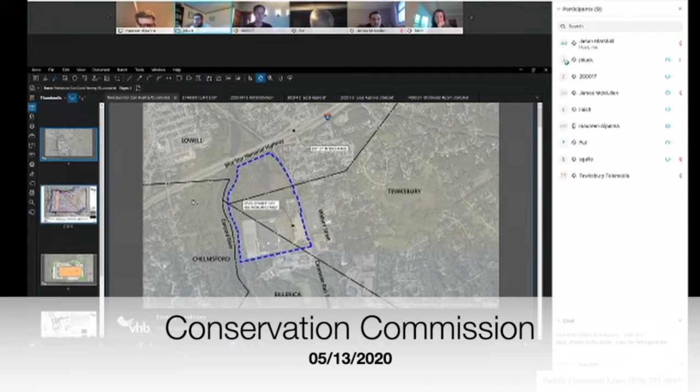All right, I'm going to share my screen here, have some graphics. So we were before you about a month or so back. This is regarding the redevelopment of the former Raytheon site at 495 Woburn Street. Here's the overall site development graphic—I'll just recap. Overall, the site is about 118 acres in total. There's about 46 acres in Tewksbury, about 34 in Billerica abutting the river, and another 38 in Lowell. The existing Raytheon building is about 445,000 square feet.

The site is bounded by a large wetland system to the north, commuter rail tracks to the east. Acre Commodities is the abutting property to the south. There is a small wetland, or part of a wetland system, on the southeast, and the Concord River is immediately to the west here.

I'll flip to the proposed redevelopment. What we are proposing is a full redevelopment of the site. The existing building would be demolished, and all of the pavement, pipes, everything will be fully scraped from the site. Here's the proposed building—about a 715,000 square foot footprint. The entirety of the site will take place within the existing limits of pavement of the former Raytheon site. You can see this green hatching along the south, west, and north—that is all area that is pavement today that will be returned to grass in its final condition.

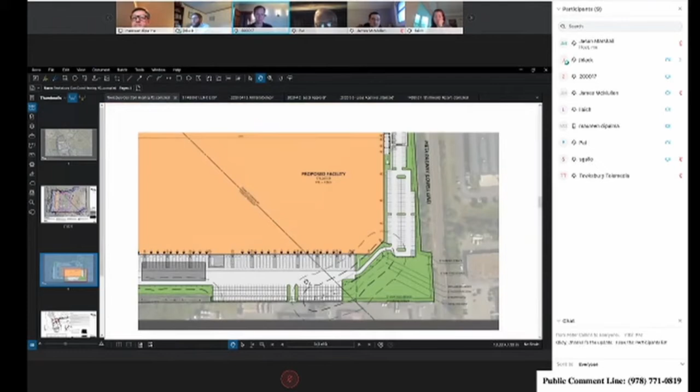Because of that wetland fill, we are proposing two separate wetland replication areas. This diagonal line through the building is the town line between Tewksbury and Billerica. As you can see, a portion of this isolated wetland is in both towns, so we are proposing two separate wetland mitigation areas. One will take place up here in Tewksbury, and another will take place in the northwest corner of the site in Billerica. I'll let Laura speak to that more in detail.

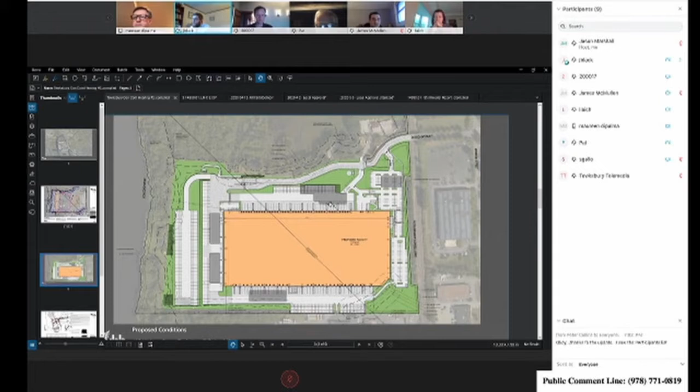We are proposing all new updated stormwater management systems. The gray hatched areas are 5 separate stormwater management areas, all subsurface. Some will be StormTrap units, some will be plastic StormTech units, but the stormwater design meets all the state stormwater standards.

Actually on Monday night we finished up the planning board process here in Tewksbury. This stormwater management system has been fully reviewed by Kevin Hardiman, the town engineer, and we had received his approval, his okay, through the planning board process.

Can I just ask you to speak a little louder? I'm having a tough time hearing. Sure, yep.

So yeah, the stormwater system itself has been reviewed by Kevin Hardiman, who okayed it, and on Monday night we had received planning board approval for this project.

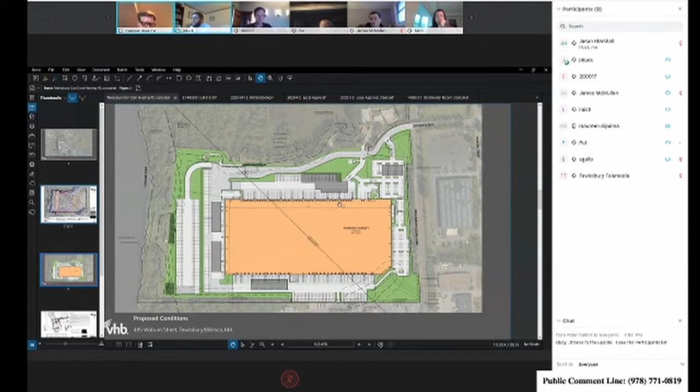Other than stormwater, all existing utilities that service the site today will be reused, including existing electrical, gas, and water connections that already service the existing building. The only exception is a new sanitary sewer force main will be proposed. That is going to be hung on the Discovery Way Bridge and will tie into an existing sewer manhole here on Woburn Street.

So that is, in general, a description of the site. I'd be happy to answer any more questions, but I'll start by passing it over to Laura, who can explain more of the wetland systems that are on the site here.

Is Laura there? She told me she was online. I think she's muted. Yes, she's not. Sorry, I can't unmute here. We can hear you now. Oh, now okay, great. Oh my goodness, I was trying everything. Thank you.

Well, I think there's a couple things to note. We touched on this during the opening hearing as well, but as Jeff indicated, the area of fill for that isolated wetland in Tewksbury is about 2,300 to 2,400 square feet. The replication area will be one-to-one on the north side of the site, but it will be adjacent to a contiguous BVW area, as opposed to creating another isolated area elsewhere.

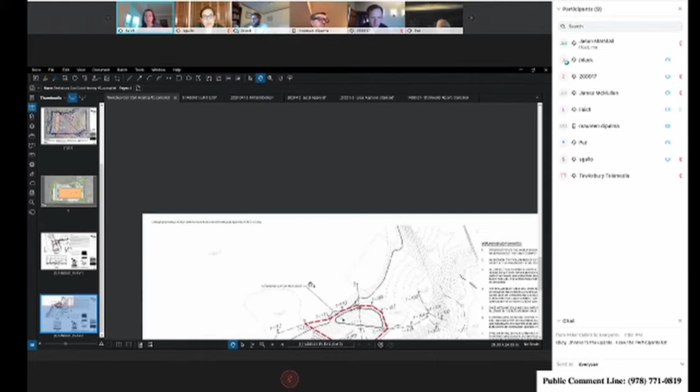This is kind of the blow up of the wetland mitigation design there. I did want to note, to give everyone a progress update, Bill Manuell, who's performing the peer review for this site, was able to walk the wetland line yesterday. He reported back that he was comfortable with the line. There were, I think, a couple flags in one particular location that had been disturbed and pulled off the existing vegetation, and he was going to write that in his response letter.

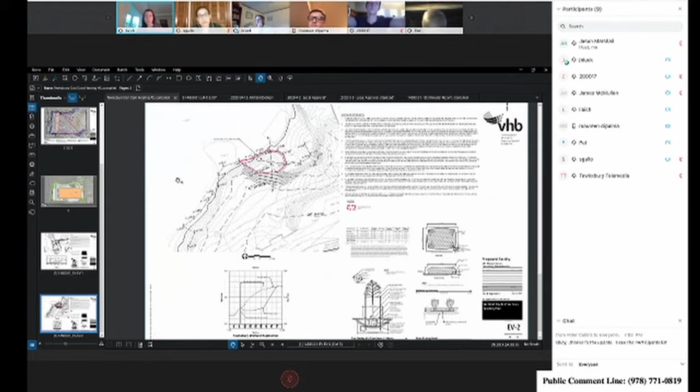So we await that. But as far as the majority of the line, he was comfortable with all of the existing flagging. As we await that response letter from him, any other questions that the commission has, we'd be interested to answer now, or adjust our revised plans accordingly to reflect any comments you have.

Okay, board members, any questions?

No questions. I have no question, Chairman.

I have a question. Just a request, could you go into a little bit more detail about the replication efforts, the isolated wetland in the southeast corner? It seems a lot larger than the locations it's going to be replaced in. So I'm not quite sure where the new locations are and what is there right now.

Yeah, so just to be clear, we're only replicating the amount. Overall, we're replicating the full amount of fill for that wetland, but because the town line bisects the wetland, there will actually be two replication areas. The Billerica side will be replicated on the Billerica part of the site, and the Tewksbury side will be here. So when I said 2,300 square feet, Jeff can correct me, I think it's 2,400 square feet. That's just what you see here in the replication area, not the entire wetland, just the portion that's in Tewksbury.

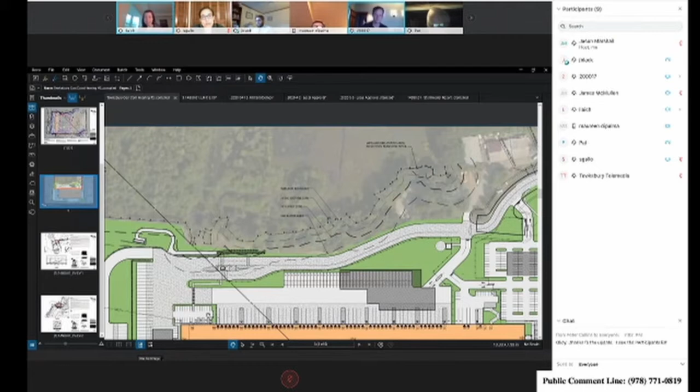Okay, I just have one question. I don't know if I asked this at the last meeting or not. There's no fuel storage on the site, is there? No, there will be no fuel storage, not exterior to the building. I believe interior to the building there will be some.

The interior of the building will have fuel? Well, I believe it's something to power the forklifts. Oh, okay, I'm looking for more, or that's less. It's all been coordinated with the fire department. Yeah, I was more or less looking for something like a diesel fuel tank to fill the trucks up with. No, there's going to be nothing outside. So there's not going to be a gas station on the premises, basically what I'm asking. Correct, yep. Okay, no gas.

All right. Members, anything else to add? Stefania? I just have two questions.

My first question just follows up on the replication area. I was wondering, you said it's at the toe of slope, the current wetland, the BVW. Do you anticipate a lot of excavating to get the slopes to be the same? I'm just wondering more about that. Yeah, it will definitely have to be dug out. There is a slope there now. I don't know if we could get you an exact amount of material that would need to be pulled out, but it will be pulling out an existing slope and creating a slope adjacent to the wetland. Jeff, maybe you can indicate the steepness of that proposed slope.

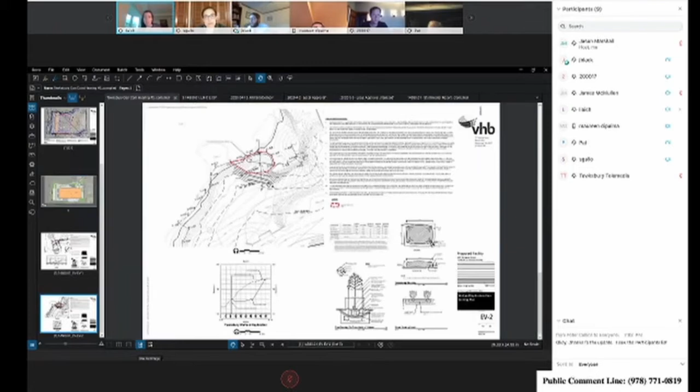Okay, the slope would be 3 to 1. Okay, yeah, that's as steep as we go with that slope. But here's a cross-section view with this dashed line being the existing grade, and this bold line here would be the finished grade. So this slope going back up would be 3 to 1.

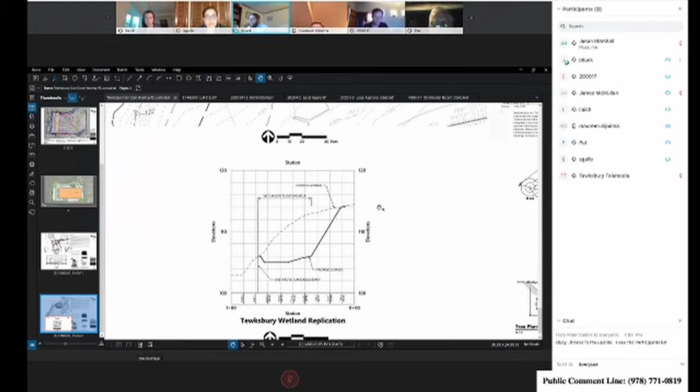And would there be an erosion control blanket used to stabilize that slope once the new slope is created, or some method like that? Yeah, definitely, we'll most likely use a blanket-type erosion control.

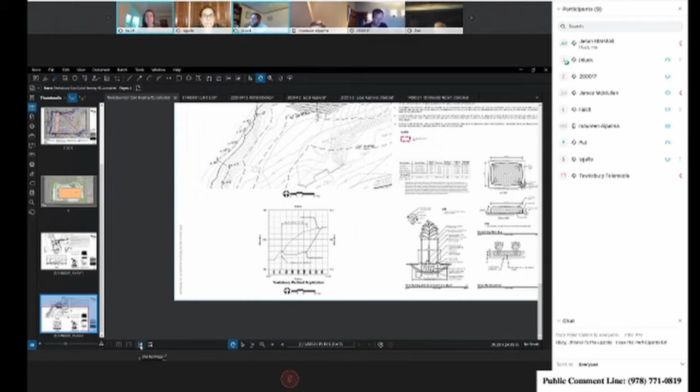Okay, and then my next question was, have you been to the Billerica ConCom yet? Yeah. I was going to say, coincidentally it started at 6 p.m. tonight, so we had an hour, and then I exited politely and came to this meeting.

Okay, so we have Connor, who you know, talking about the project as we speak with Billerica. But yes, they are evaluating it as well. We did receive a full comment letter back from Beta, their peer reviewer, relating to stormwater, and we are working through those comments with Beta, nothing substantial.

I would just be curious to know how the meeting went tonight. Yeah, we can report back. I believe they're probably still ongoing. They evaluated the demo portion first, and I think that was close to finishing, but they hadn't really gotten into the redevelopment aspect yet when I left. So we can confer and then report back to you.

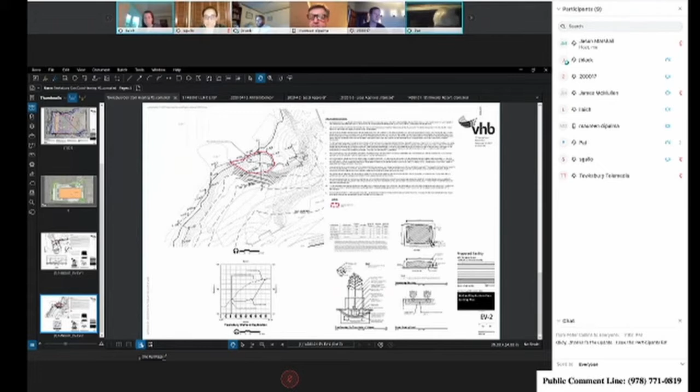So we're probably going to continue this to our next meeting. I tried to get the Billerica thing on the TV here to see where they're at, because if they reschedule you to their next meeting, I don't want it to be on the same day. If theirs starts at 6, then we'll put you later in the agenda on the same evening if we have to.

Yeah, sure, that would be great. I don't know if they have another scheduled meeting. This was kind of a last minute scheduling for them, so I'm not sure what their upcoming one is, if it's on the same day as yours. But either way, we have staff to be at both hearings.

Okay, we'll be present. Well, that's my main concern, that you have staff to go. I don't want to have both of you at two different meetings at the same time, put it that way. No, we split it up tonight. I do believe their next hearing is the 27th.

Okay, so we'll continue this to the 27th on ours. I don't know what they will do, but we can kind of jockey. If their meeting starts at 6 and we don't start till 7, we could push you off to the last item on the agenda so you have time with Billerica. How's that sound? Sure, that sounds good.

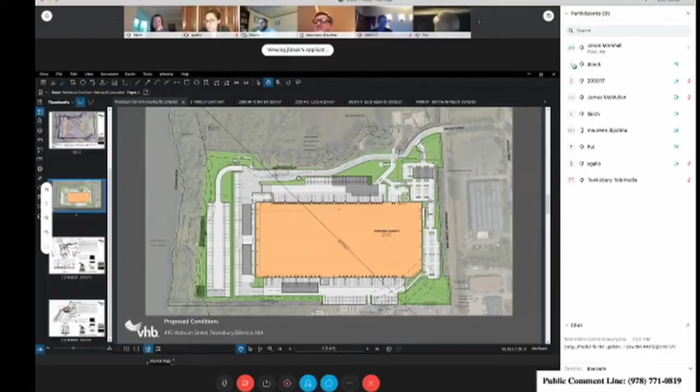Okay, I'm going to entertain a motion to continue notice of intent for Adam Goldberg, C. Fry Properties, 495 Woburn Street, Map 1, Lot 1, and 40 Discovery Way, Map 1, Lot 3, DEP number 305-11112, to our next meeting of May 27th. Can I have a motion to that effect?

So moved. Can I have a second? Second. Mr. McMullen, how do you vote? Aye. Mr. Ronan, how do you vote? Aye. Mr. Sheehan, how do you vote? Aye. Chair votes aye as well.

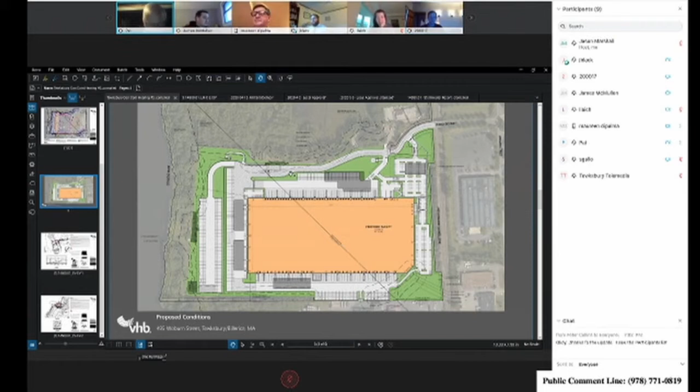We'll see you at our next meeting. Hopefully it'll be a live meeting and not this virtual stuff. Yeah. Okay.

Next on the agenda, so we'll see them on May 27th. Next on the agenda is, oh, it's the same. Okay, here we go. Public hearing, notice of intent, EIP 495 Woburn Street, LLC, 495 Woburn Street, Map 1, Lot 1, and 40 Discovery Way, Map 1, Lot 3, DEP number pending.

Okay, if you can just introduce yourselves for the record one more time so we have it, since it's a different issue. Sure, yes, my name is Jeff Black, civil engineer with VHB on behalf of the applicant, and I'm also joined by Laura Leach, wetland scientist with VHB.

I think I lost you. I can't hear. Oh, did I get muted? Can you hear me? Yes, I can hear you. I can barely hear you. Okay, I'll speak up a bit.

So again, my name is Jeff Black with VHB, civil engineer on behalf of the applicant, and I'm also joined by Laura Leach, the wetland scientist with VHB as well. So I'll start again, I guess, with the site. This is the same site here, we're talking about the 495 Woburn Street site.

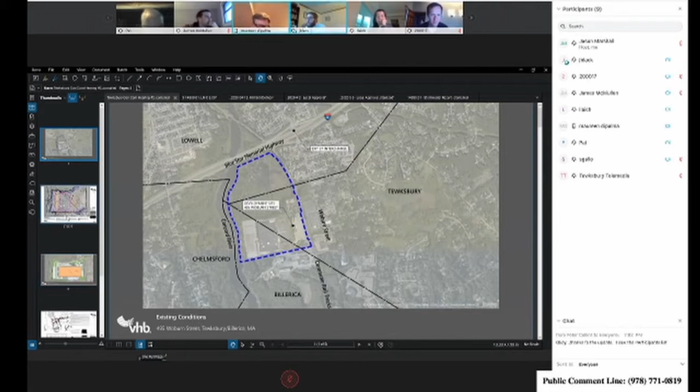I guess I'll explain why this project is sort of broken up into two applications here. The application I just spoke about regarding the redevelopment is for Seafried Properties, who is the developer in charge of constructing the proposed facility. This work will be undertaken by Equity Industrial Partners, EIP, who are the landowners. So what this notice of intent is regarding is the demolition of the existing building and also an electrical connection that will help facilitate the demo and help keep some of the environmental remediation activities at the site ongoing throughout the duration of construction.

So what I have here shown is a graphic showing the extent of the electrical work, which would be constructed. That would be the first thing that's constructed. Like I said, the reason being there's an existing substation here on the southeast corner of the site.

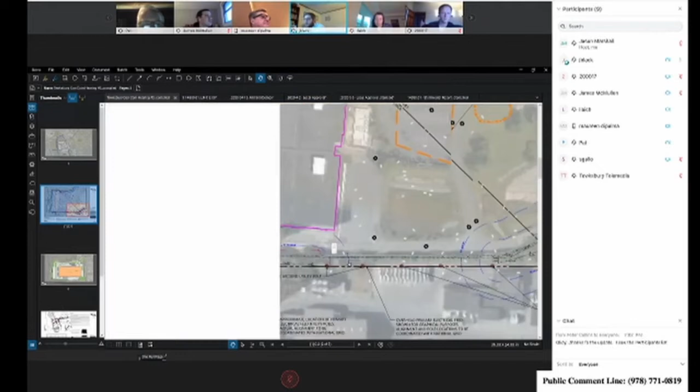What you can see here in red is along this length of the property would be installed overhead electrical poles and overhead wire and utility poles.

Once we get down into the southwest corner of the property, there would be a transformer and other electrical equipment, which will be used to power several of the historical remediation activities ongoing at the site.

From this transformer location, there would be underground conduit. So from this point north, everything would be underground, installed within the existing pavement. There would be a conduit that runs here, which would intercept an existing conduit and power a facility.

GZA is the LSP of record. They have a box here that needs electrical power, and then there is an existing Connex box at the northwest corner of the site. So this electrical connection would go into the Connex box, and then it would also come out and power the existing pump station. All of these facilities right now are powered from the existing building, so they need to get the electrical connection hooked up to these existing facilities so they can continue pumping and treating and doing the work that they're doing today once the building is demolished.

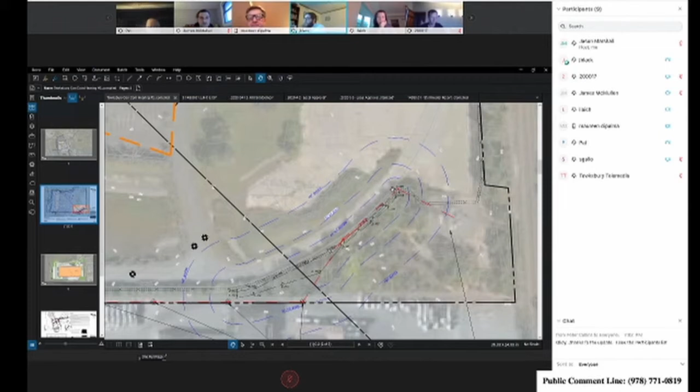We have erosion control to help contain. It's just a utility pole going in, so there would be no trenching or anything. Here, it would just be the installation of the electrical wires and the poles. So all of Tewksbury is going to be above ground.

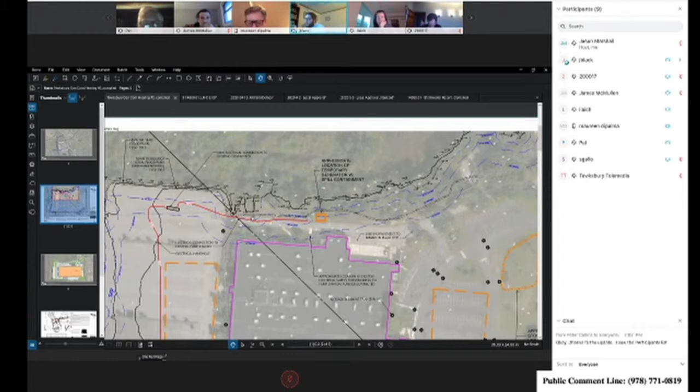Almost. So once the electrical makes this loop around from this Connex box to, this is the approximate location of the existing pump station, that pump station would need to be serviced by an underground conduit that would come from the Connex box and power this pump station. So there would be some bit of underground conduit in this location here, and then following that ultimately would be the demolition of the building itself.

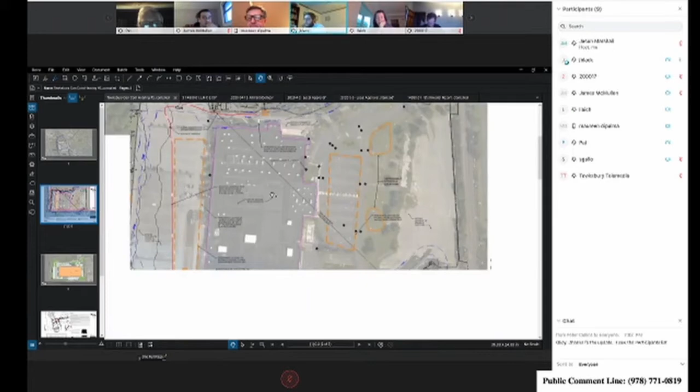I believe none of the building itself is within the buffer areas of Tewksbury. So that's in general what the extent of the NOI is related to the building demolition and electrical installation that would precede any sort of the redevelopment activities we just spoke about.

Okay. Stefan, any issues? No issues. So like you had said, we are waiting for DEP numbers still, so we will have to continue because of that.

I had a few questions that I had asked Laura about, and she cleared that all up for me. I wanted to clarify that the 2 utility poles near the isolated wetland weren't actually in the wetland, and were outside the wetland, and that there were no impacts associated with this application. Then I would have just one question, for both projects: overall, do you have an anticipated length of time that the whole project would take?

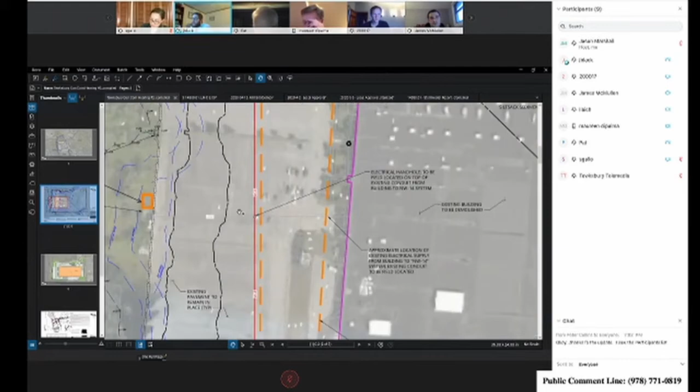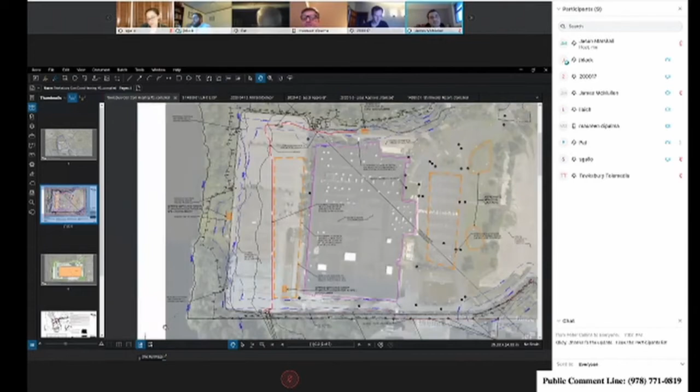I have one question. The pole area, is that going to be permanent, or is that just for the deconstruction of the building? Is it going to change when they build a new building, or are the poles permanent? The poles would all be permanent. That's why it's sort of pushed off to the edge of development, so they could ultimately redevelop around it.

Okay, so are they going to be like a telephone pole or a cement pad? It would be like a telephone pole. Okay, that was all I had. I wasn't sure if it was going to be temporary during the deconstruction versus the construction.

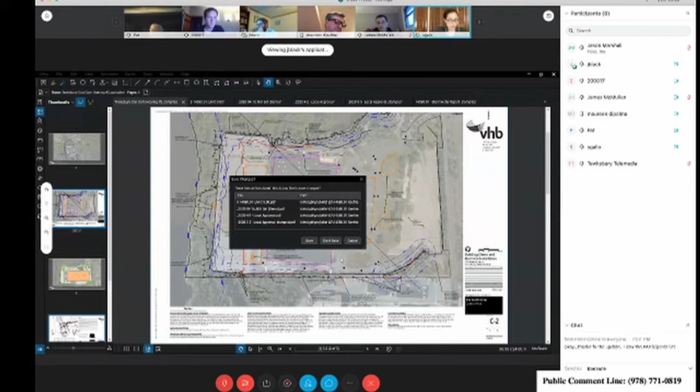Okay, let me just get my notes. So this enforcement order was issued last summer, in August. I don't know if anyone remembers. It was for clearing, filling, grading. There was underground pipe, gravel trenches. So the commission had ordered restoration of the area, and they had provided plans, and they had a wetland scientist helping them with the restoration plans. So in that enforcement order, it was continued to May 2020.

So that's why it's on this agenda. I reached out to the homeowner. I did hear back from the consultant who said he was going to speak to the homeowner and get back to me. I did a quick drive-by this week just to see what the area looked like. Obviously without being on site and really taking a good look, it's hard to tell, but it does look like something has been done. It definitely was not in the condition that it was in last August. So for now, I think not much needs to be done. I think we would just continue to another date so that we can get an actual update and I can do an actual site visit.

Okay, so you're waiting to hear back from the homeowner or from the wetland scientist? Either or. The wetland scientist, Steve Erickson from Norse, is the one that responded to my email, and he said he would get back to me once he spoke to the homeowner. Okay, so why don't we bring this up at the next meeting, since it's still May. Okay, and you might hear from that person in the meantime. Yeah, okay.